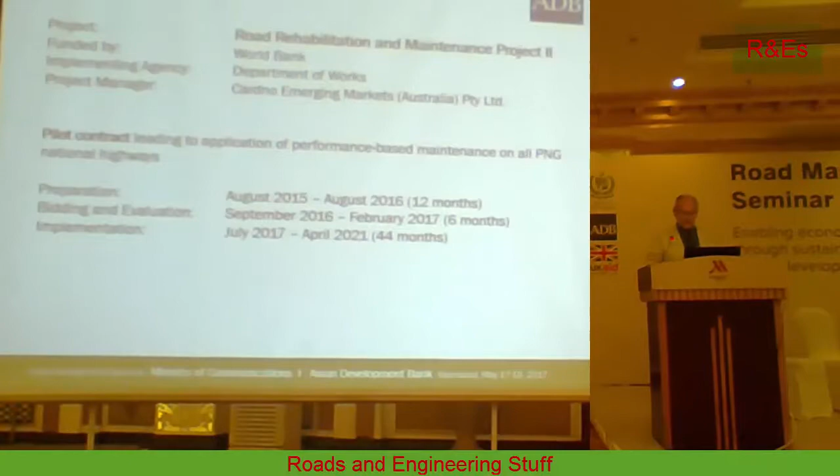The contract itself is a pilot contract for an important section of highway that is intended to then be used as a model and applied to all of the national roads in Papua New Guinea. And at the bottom of the slide, you can see the amount of time that it has taken so far.

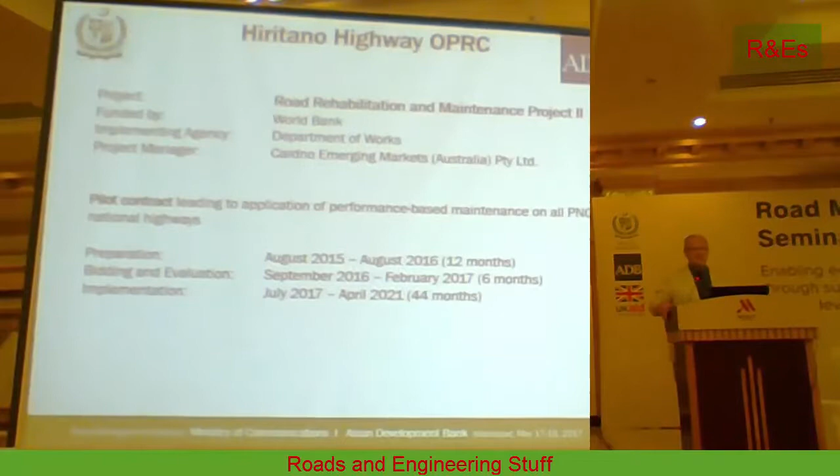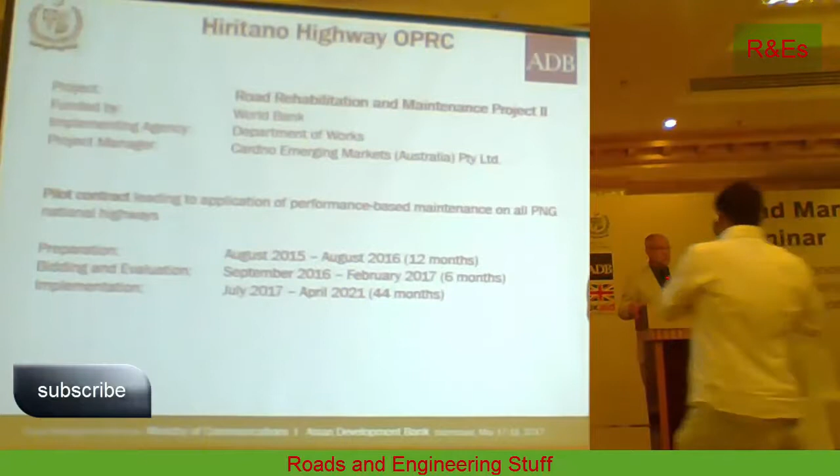The preparation took 12 months. The bidding and evaluation took 6 months. So that's basically 18 months from start to be able to award the contract. And the implementation of the contract will be 44 months. Originally, we had hoped for 60 months, but there were many, many delays in getting started, until I arrived, actually. And so the period of the project is actually determined by the loan ending date. So unfortunately, we're reduced to 44 months, but that is not going to change the principles and the activities in the contract.

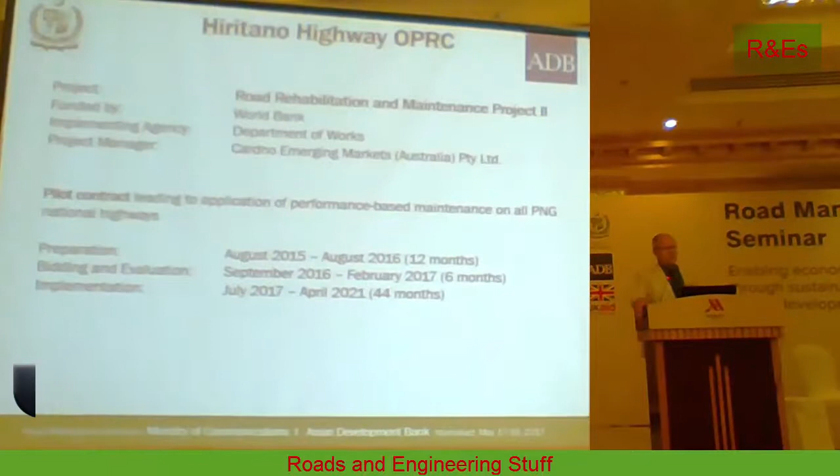So the Hiritano Highway is about 375 kilometers in length. It runs along the Gulf of Papua. The OPRC section is 112 kilometers. Just to clarify, OPRC is Output and Performance-Based Road Contract. That was the name that has been used in the past, but World Bank and ADB have now changed the terminology, and now we're using performance-based maintenance contract. But we're having to stick with OPRC because of the contract.

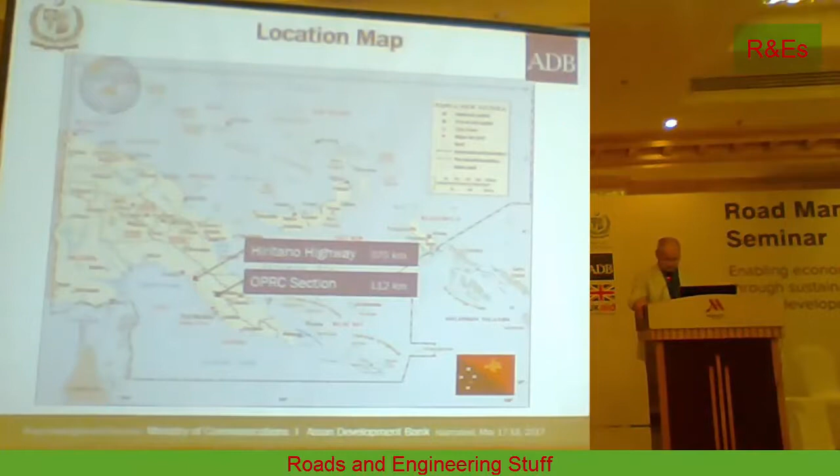The road runs through different terrains, plain areas, hilly areas, and along the road, the chief activities are growing betel nut and rubber plantations. And the road gives access from the capital, Port Moresby, up to a future development of the gas fields along the Gulf of Papua.

And what's interesting is that the road passes through different tribal areas, and Papua New Guinea is renowned for the variety and the number of different languages that are spoken, totally different languages. And along our 112 kilometers of road, 5 different languages are spoken. And the only way one group can speak to another group is through Pidgin English.

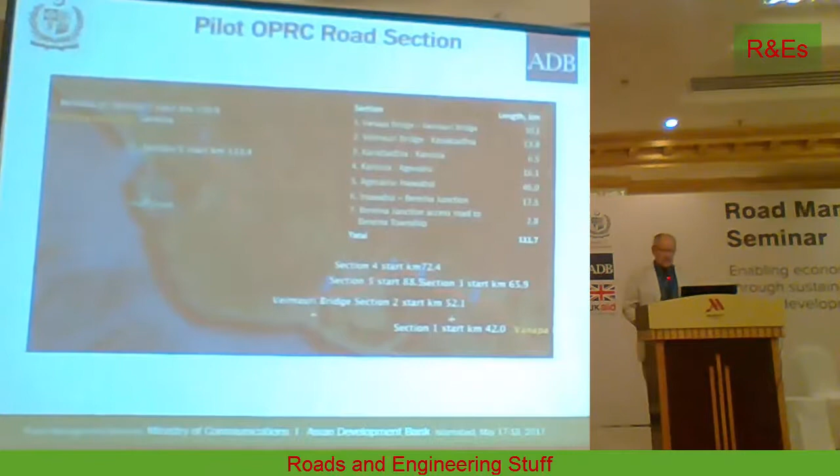You can see on the map, we have divided the road into 7 sections. And here are some more details of the 7 sections. We've sectioned them based on their construction history. You don't need to go through the table in detail, but basically the road was upgraded over about a 20-year period, progressively moving from east to west.

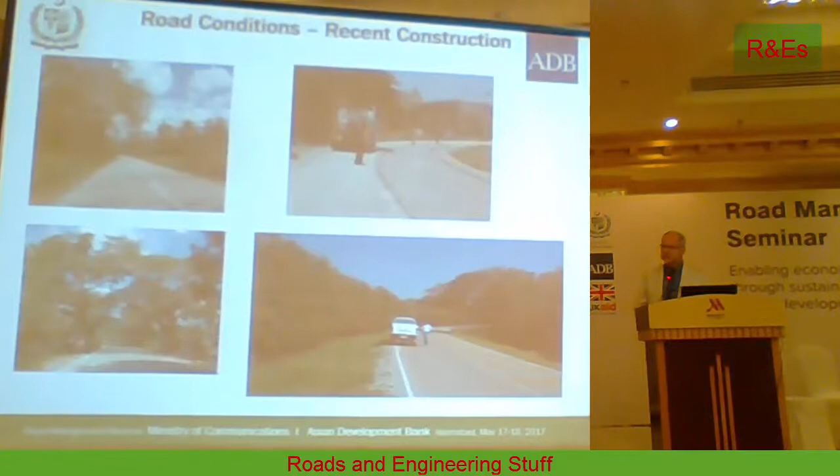So just a few photographs of the sections of the highway where there was recently completed construction in the last 2 years. Those sections are in very good condition. Then the oldest section of the highway is in bad condition. It's partly destroyed, and part of it is going to need total reconstruction. Part of it is going to need a mill and overlay.

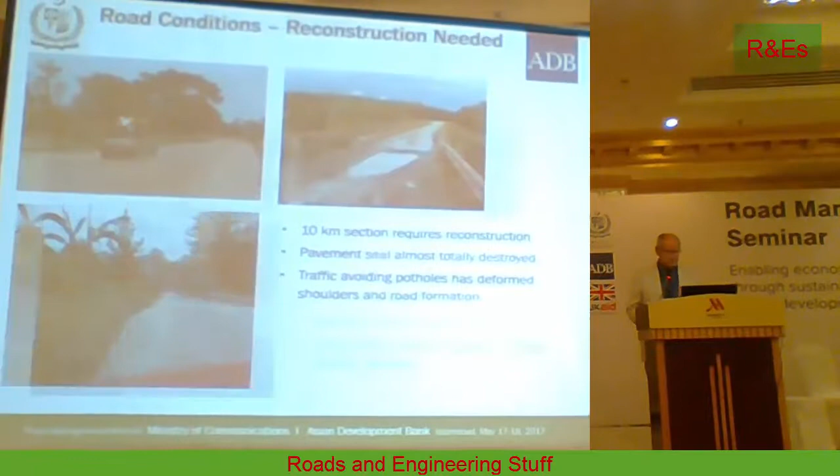Again, pavements and shoulders along the highway, the conditions varied from being reasonable to many, many flaws and defects. And unfortunately, the local residents have a habit, when they want you to slow down going through their little market area, they simply cut a couple of trenches across the pavement to force you to slow down. Or they put in their own hand-built speed humps. So there's a lot of interference from the locals with the condition of the pavement. But we think we have a solution to that. I'll come to that later on.

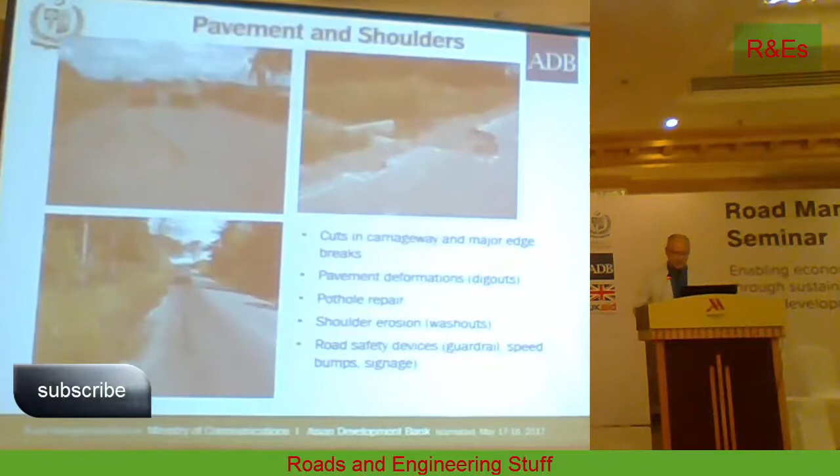We have 7 bridges. Generally, the bridges are in very good condition, but what happens is the protection of the abutments using gabion baskets tends to get washed away or eroded by the very high level of flooding that continually occurs.

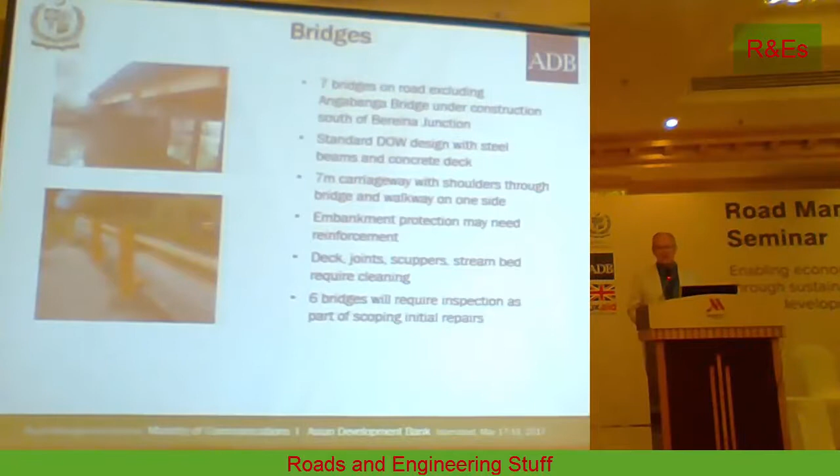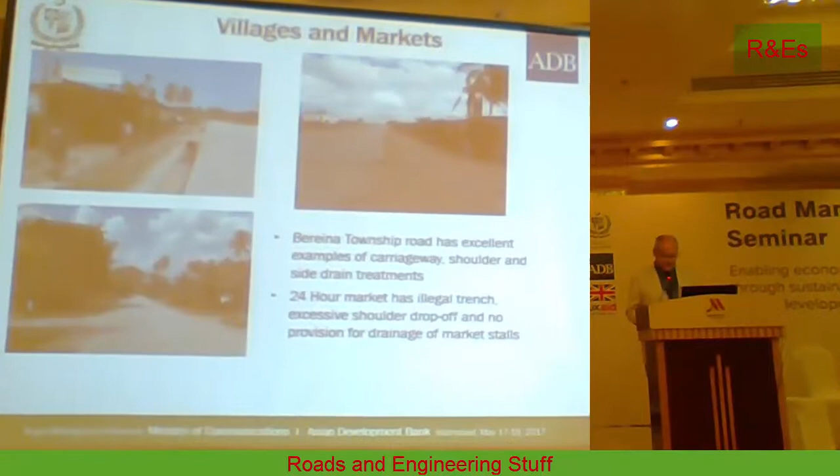Villages and markets, depending on where we are along the road, some markets are very well maintained. Other markets, particularly where they transfer the betel nuts at night, are very badly maintained with trenches in the pavement.

So I suppose the condition of the highway can be summarized in this graph, in which we show the length of the highway along with the roughness measurements on a per kilometer basis. And there's quite a clear trend. Starting at the left-hand side is the oldest section of the highway. And as we proceed along, the roughness reduces, and the newest section of highway has the lowest IRI reading, except for one spike, which is a bridge under construction.

So what we need to do during the course of the contract is, of course, bring down the roughness in the first section and make sure that the roughness on the other sections is not going to increase to any significant degree.

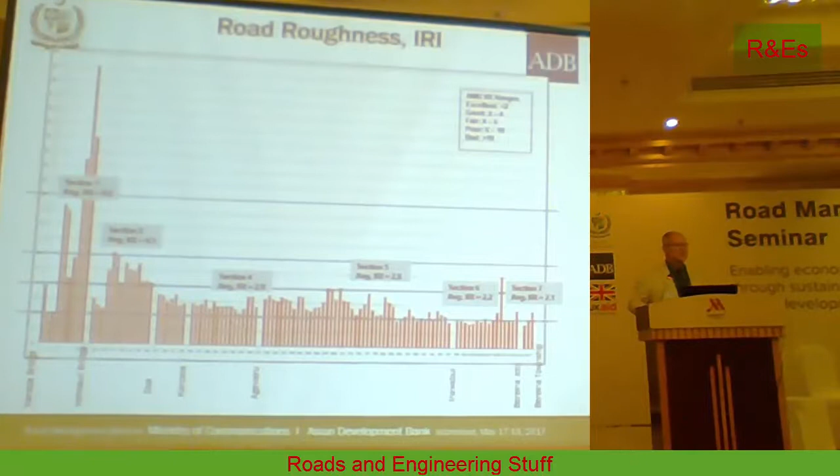I haven't shown a traffic slide, but the traffic on the highway is roughly 1,000 vehicles a day. There's a few trucks, but it's mostly passenger vehicles or trucks that are carrying passengers. And most of the freight carrying trucks are articulated vehicles. So there's less concern about heavy axle loading because they're carrying containers where there's less likelihood of having very heavy overloads.

Now, this is perhaps the most important slide, because it's going to demonstrate the approach, the strategy, the kind of solution. Given this top band, you have a road in 7 sections, 112 kilometers in length. But you can see we have color-coded the condition of the road. So in the first section, there's 4 kilometers of road in red that needs to be totally reconstructed.

Then there are 2 sections of road marked yellow that are in fair to poor condition, and they will require periodic maintenance very quickly. Then there are 3 sections in pale green that we expect will require periodic maintenance during the 4-year period of the contract. And finally, there are 2 new sections in the brighter green on the right-hand side where we don't expect there to be any resealing required during the contract.

So how do we go about tackling these road sections? You could also think of them as independent roads, a network. It's just they happen to be lined up. The first thing is we looked at the initial works of Section 1. It's divided into 1.1 and 1.2. It's 10 kilometers in length. And what is required there is the destroyed section, if you will, of 4 kilometers, needs to be totally reconstructed. And the balance, 6 kilometers, needs to be rehabilitated through a removal of the crust and additional base course material and then a reseal.

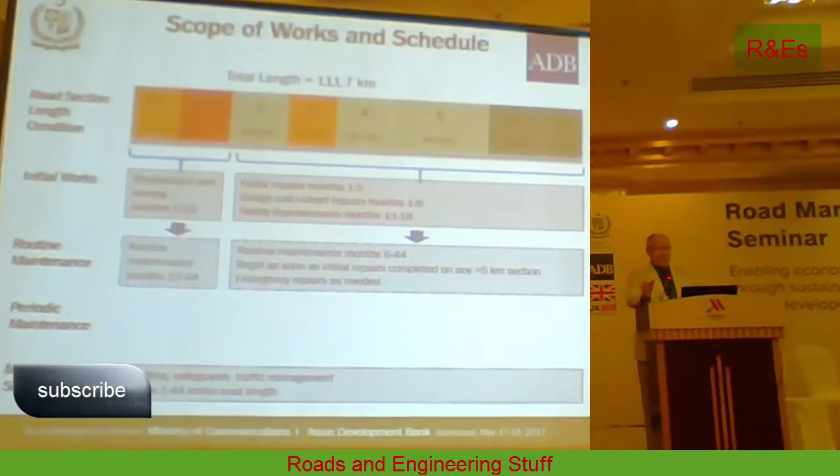Routine maintenance on this section, then, would start as soon as they complete the initial repairs, tentatively between months 6 and 44. However, as mentioned earlier, if the contractor completes his initial repairs on any 5 kilometer section before the 6 months, he can then immediately go into maintenance services and be paid his monthly maintenance services payment for those 5 kilometers. So there's an incentive for him to complete the initial repairs as fast as possible.

If I were a contractor, I'd immediately go to section 6 and 7, get the grass cut, get the culverts cleaned up, bang, and then go to the employer and say, right, I'm finished that. It's only 1 month now. I would like to start maintenance services, which he's perfectly entitled to do.

Now there's this other component, periodic maintenance. Now this is where it is a hybrid contract. It is not a purely performance-based contract. Because, as you saw earlier, and you can see on the ribbon at the top, the pavement conditions vary all the way along the road. So we are including a periodic maintenance component with its own separate bill of quantities for resealing or overlay as needed, between months 13 and 44.

Now we know that section 3, 6.5 kilometers, definitely requires periodic maintenance. So we have scheduled that for year 2. But periodic maintenance or overlays on the remaining sections would be decided at the end of each year and programmed for the following year. And it would be proposed by the contractor, the one contractor, and discussed and agreed with by the employer.

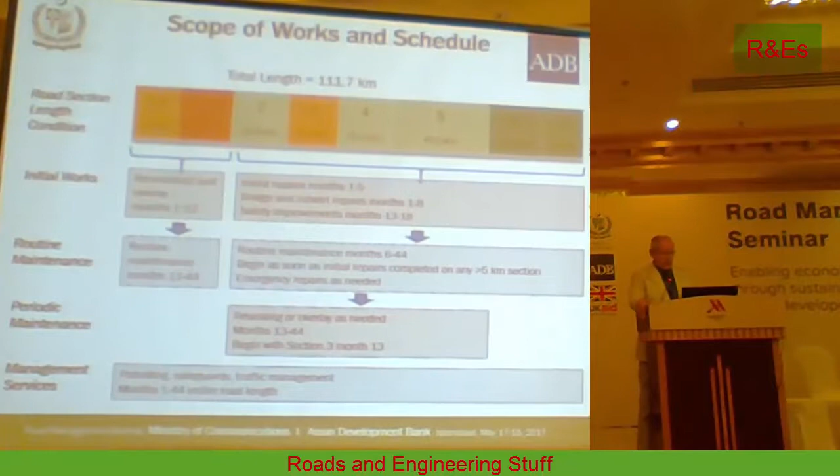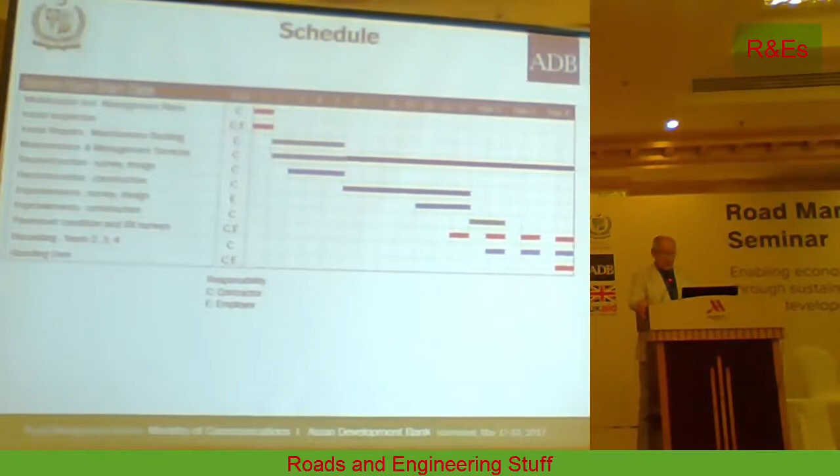Because we cannot predict exactly how the pavements are going to deteriorate over the next 4 years, there needs to be this flexibility. And of course, at the bottom, all of the road is covered by management services. Just a schedule showing how all of this is going to happen over the 4-year period.

Skip that. Now let's look at the actual bid document itself. It is based upon the World Bank OPRC standard bid document that was published or revised in 2009. Now, as it turns out, the World Bank has further revised this document in January of this year, 2017. And it's now called the Performance-Based Maintenance Contract Standard Bid Document. There are some minor changes between the OPRC and the 2017 document, but they don't change the intent at all.

And just for the information of KP, the performance-based maintenance contract that ADB is preparing will be using the World Bank 2017 version. So you'll have the benefit of the latest version. So if we look at what's in this document, I think many of you will immediately recognize the sections of the bid document, 1 through 6. Number 7 is the specifications, and then the conditions of contract.

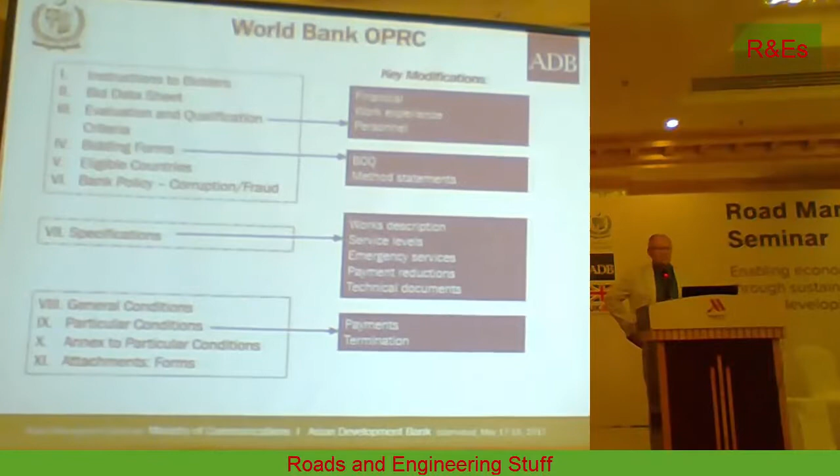And now we move down to the last box. We've got the general conditions, particular conditions, etc. Particular conditions: we have to describe the payments, how payments are going to be made, and, if you will, any criteria or conditions that would allow the employer to terminate the contractor. Because we've heard experiences where contractors fail to perform. It's sometimes very difficult to terminate the contract. Well, we think we have some conditions clearly described that would allow the employer to terminate the contractor if it became necessary.

Now let's look at the bill of quantities. And when you think about it, this is the first thing the bidders are going to look at. They're not going to read through all your words and everything. They're going to go immediately to the bill of quantities and see what works they have to do, what rates they have to quote, and, looking at it cynically, how they can, if you will, exploit this contract to their benefit. So the bill of quantities is very, very important.

So, first item is bill number 1, general. And it covers mobilization, insurances, and the preparation of a series of safeguard and quality assurance plans that the contractor has to submit in the first month of the contract. And he will be paid a lump sum for each one of these plans that he submits.

We mentioned safeguards because the project is funded by the Asian Development Bank. We have to comply with all of the ADB's safeguard requirements. And it turned out the best solution was to require the contractor or the bidders to submit their plans for complying with all of the bank's safeguard requirements.

Number 2 is the non-performance part of the contract, the initial repairs of 102 kilometers. So that's excluding that 10 kilometers. That's the rest of the highway, where there will be repairs to the pavement, to the drainage, to furniture, vegetation clearing, etc. All of those works will be paid on a remeasurement of quantities.

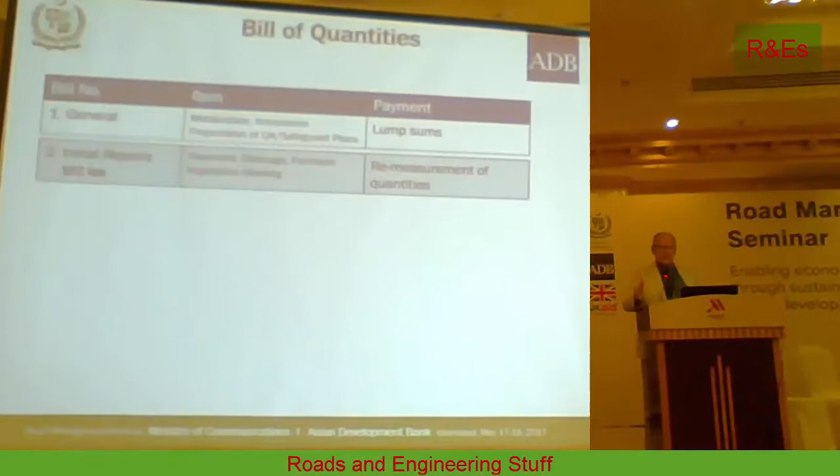And the reason is, number 1, it's a pilot. Number 2, there are lots and lots of defects in the existing highway. It's very likely that in a future contract like this, we might ask for a lump sum to complete all of the initial repairs. But because it's a pilot, because there are many, many defects in the road, and we wanted to attract good contractors and allay as much risk as practical, we have made the initial repairs a paid item based on remeasurement of quantities. It's not perfect, but we've got to make this work.

Number 3, reconstruction of the first 10 kilometers. Here we have made it basically a survey, design, build, and maintain a particular level of roughness, involving reconstruction over 4 kilometers and overlay over 6 kilometers. And that is going to be paid on a lump sum. So this is, if you will, the pure performance-based maintenance part of the contract. And we're very pleased to include it because it gives us a chance to try out this kind of pure performance part.

The fourth bill is the maintenance services over the entire 112 kilometers. It covers the routine maintenance activities in the field and what we call management services, the self-control unit and its implementation of all of the safeguard plans. And he would be paid a single rate per kilometer per month.

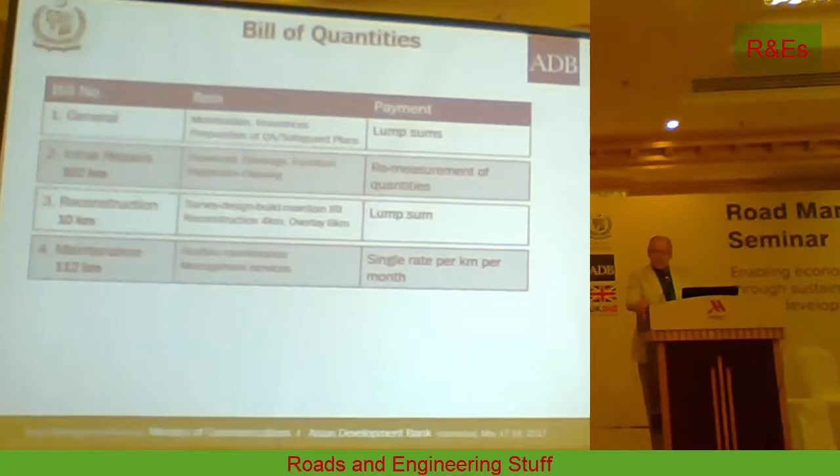Number 5 are the improvements. These include sealing more shoulders, constructing footpaths, additional signage, additional pavement markings for crosswalks, and probably additional guardrails. And we don't know the quantities yet until we get the initial repairs completed. So this is going to be paid on remeasurement of the quantities.

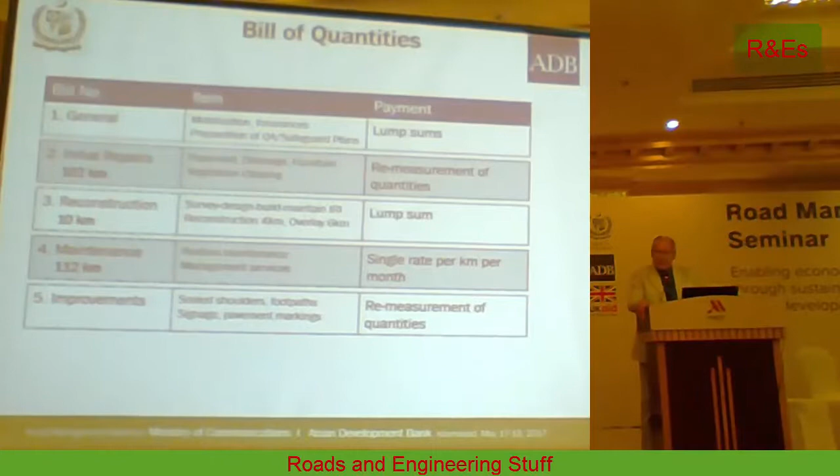Resealing, we are estimating 50 kilometers of resealing will be required during the 4 years. We have specified 5 sealing options, and the bidding document has an all-inclusive rate for each type of sealing option, with a simple measurement per square meter as fully restored, including pavement markings, speed bumps, and so forth.

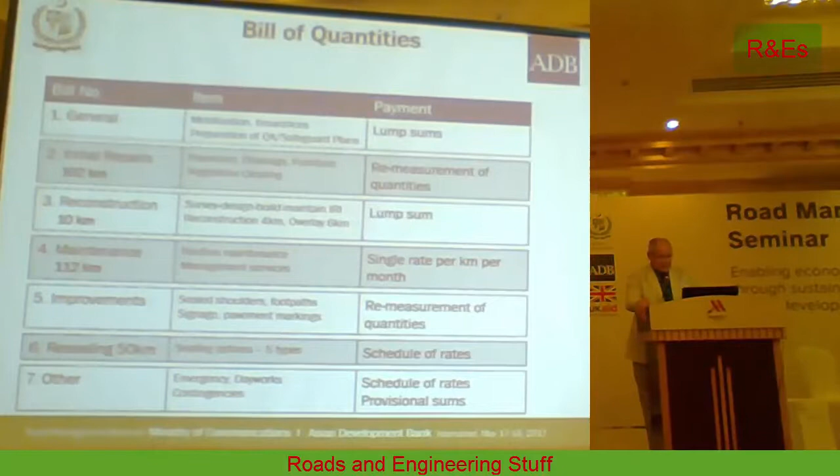And 7, there's the usual emergency services and day works and contingencies, and we are providing a schedule of rates and provisional sums. So this gives the employer something in his back pocket to get works done that are not covered under the other bills. So payments. How are payments going to be made?

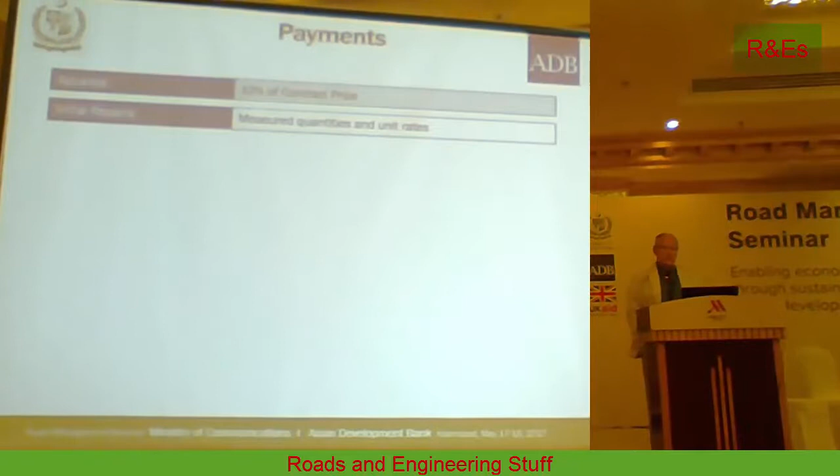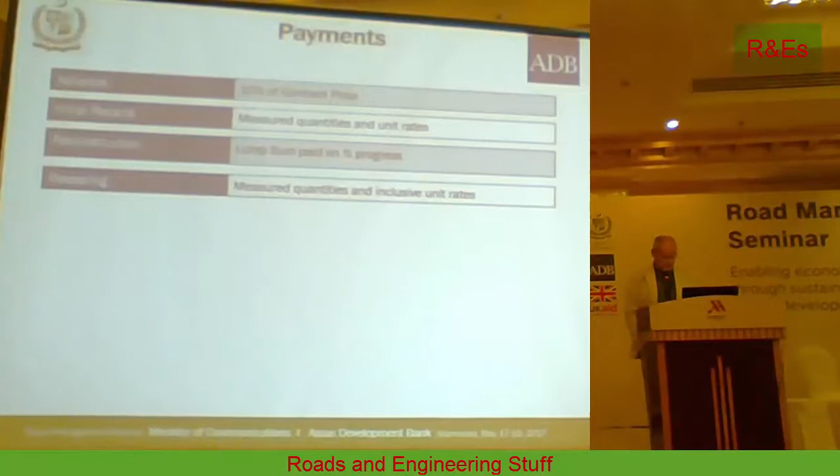Okay, number 1, the contract provides an advance of 10%. The initial repairs, there's a bit of repetition here, will be paid on measured quantities and the unit rates in the contract. Reconstruction of that 10 kilometers is a lump sum that will be paid as a percentage of progress as agreed between the employer and the contractor. Resealing will be measured quantities based on inclusive unit rates, as I mentioned. Improvement works, measured quantities and unit rates.

Maintenance services, I think we're going to use the basic procedure of a unit rate per kilometer per month. And payments can start as soon as the contractor has completed any 5 kilometer section. And there will be reductions from this maintenance service payment for non-compliance with the service levels. I'll give you some examples in a few slides.

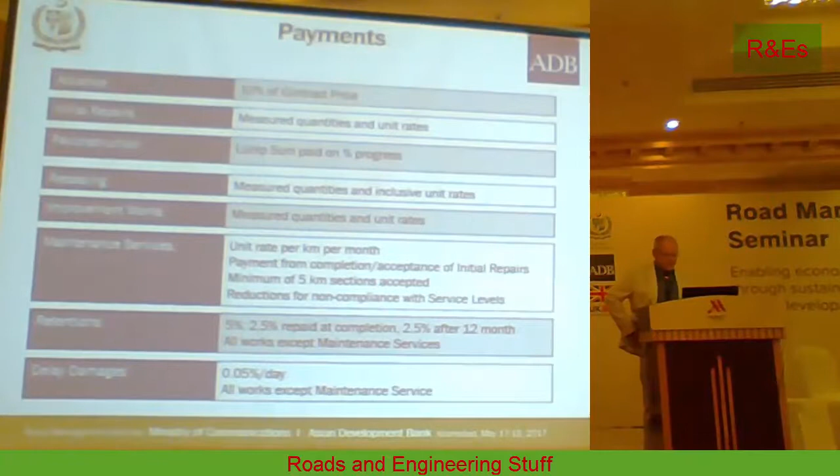Retentions, 5% retention, 2.5% repaid on completion of the initial repairs and rehabilitation works, and 2.5% after 12 months on all works, but there's no retention on maintenance services. Delay damages, 0.05% per day on all works except maintenance services.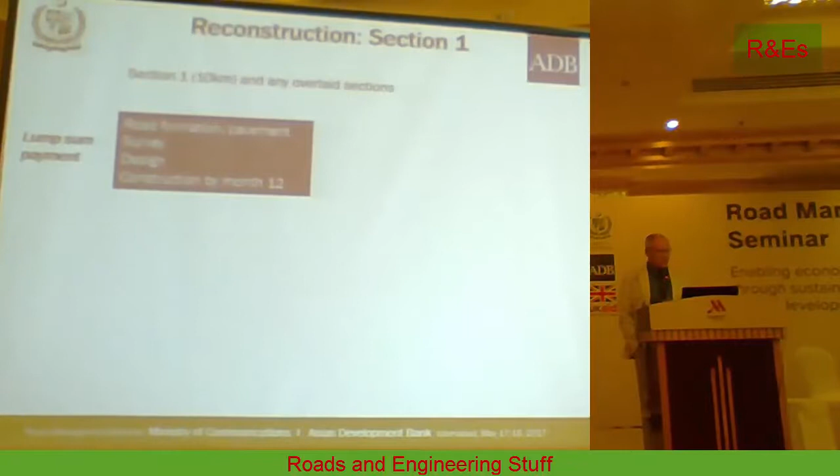So, Reconstruction Section 1. Now this is, again, a special case. So, what is required here? Section 1 is 10 kilometers. It also applies to any, I have to digress here for a moment. Remind me, when I go through the slide, I'll come back and explain. He will get a lump sum payment for the survey, the design, and the reconstruction of this Section 1, 10 kilometers.

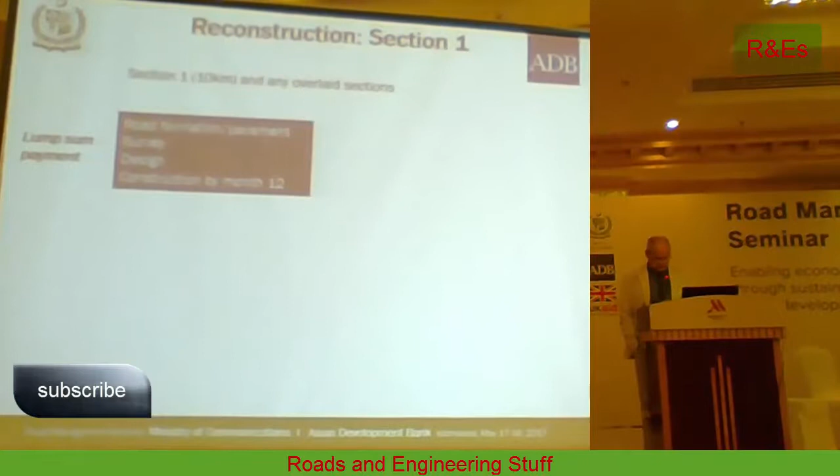But it's performance-based in the sense that he has to meet a roughness criterion. Number 1, it's measured at the completion of construction and then annually. And at completion of construction, he has to achieve an IRI under 2.3. And he has to maintain it at under 3 for the balance of the contract. If he cannot maintain it, he has to carry out remedial actions as required, or he will face a payment reduction.

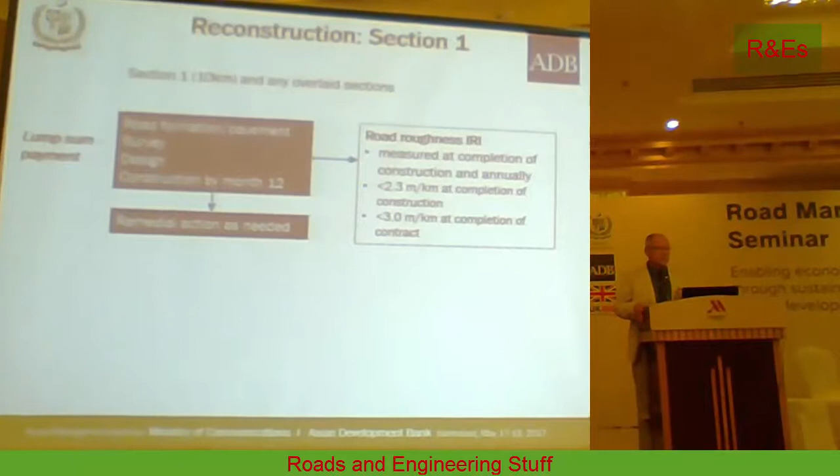This same model also applies to any section along the highway where there's an overlay done in the later years. If it's a straight reseal, the contractor cannot be responsible for roughness. But if the road section has deteriorated to an extent where he has to take up the seal, apply new base course, compact, and then put down a new seal, then we're saying you have to do that and comply with these roughness standards.

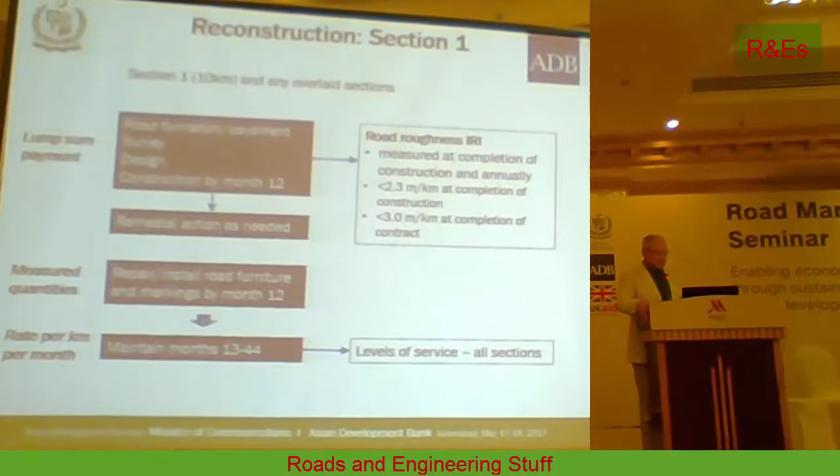Now in section 1, it's also a little bit complicated because in addition to reconstruction of the pavement, he's also got to replace the road furniture, etc. So those items he'll be paid on a measured quantities basis. And then as soon as he has finished section 1, he can finish it in 5 kilometer sections because that applies. Well, it's only 10 kilometers. He will then maintain that 10 kilometer section and be paid for his maintenance services.

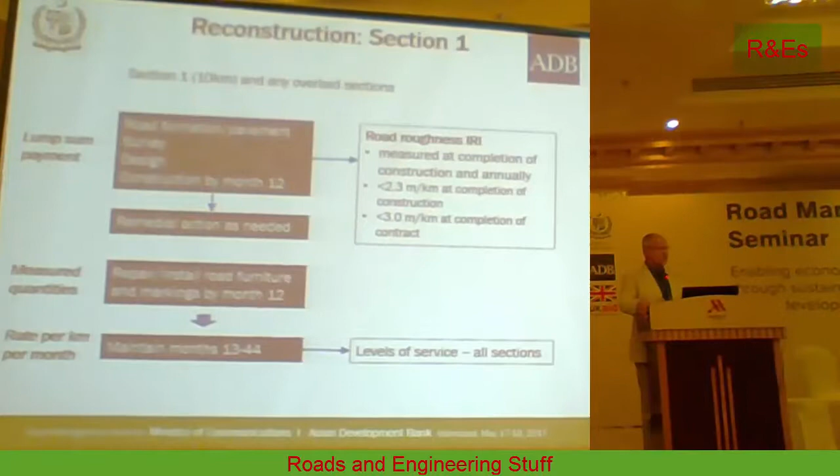Method statements. The bidders are to provide method statements for the initial repairs, reconstruction, resealing, maintenance services, and operation of the self-control unit operations. This is a very important part of the bid because we as the employer had to be absolutely assured these bidders understood what performance was required in the contract. During the bid evaluation, we actually disqualified 3 bids because their method statements were insufficient, and it was clear they did not understand what was required. So these method statements are very important.

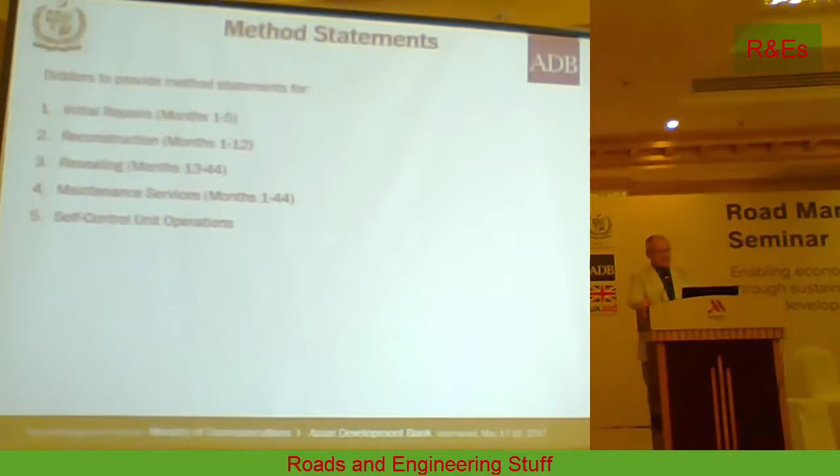The bidders also have to submit method statements for the environmental management plan, social and gender awareness plan, health and safety management plan, HIV/AIDS prevention program, emergency procedures, and traffic management plan. Most of these have been applied many times in many contracts, except number 10, emergency procedures. Usually that's a responsibility of the traffic police or the highway agency. In this case, he's taking over the highway, so he has to have an emergency procedures plan.

So if there's a road crash or a bad flood or something really serious happens along the road, he's the first responder, before the police show up after a couple of days. He is the first responder, so that's a responsibility that he's taking over.

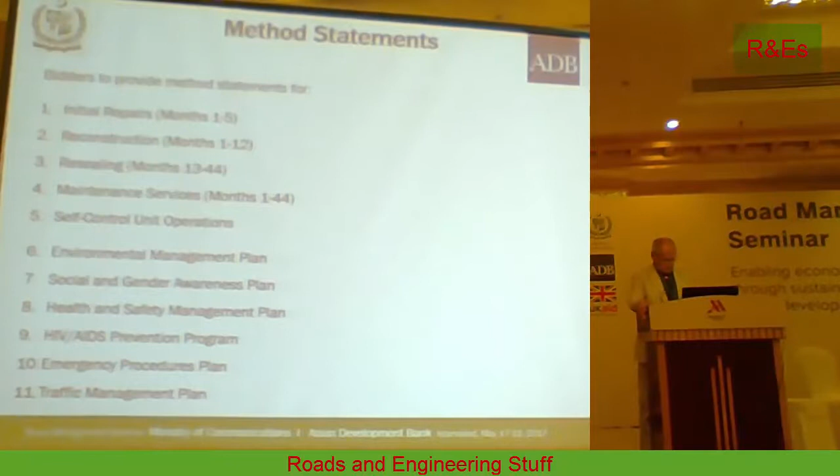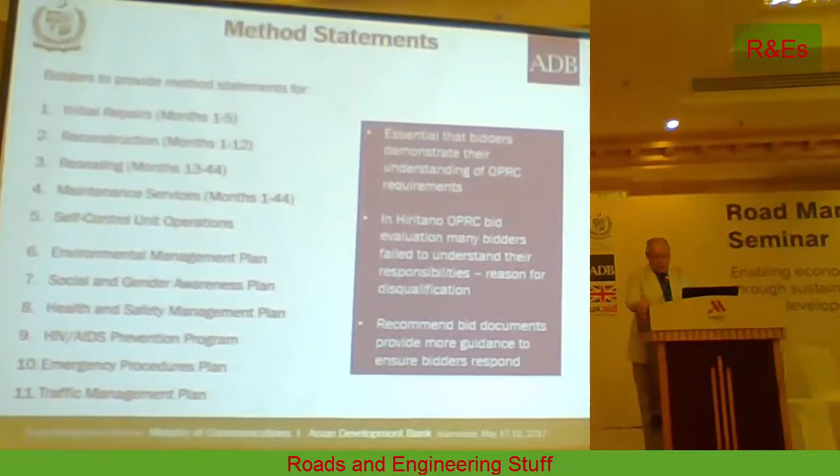So it's essential that bidders demonstrate their understanding of the bid requirements, the OPRC requirements. And as in the Hiratano OPRC bid evaluation, many bidders failed to understand their responsibilities. That was a reason for their disqualification. So we're recommending that bid documents provide strong guidance to the bidders so that it clearly defines what you want to see in their bids.

Specifications. They're divided into 4 parts: general specifications, and that's subdivided into work requirements and maintenance requirements. Let me explain. The work requirements basically describe the input-based part of the contract: what's required in initial repairs, reconstruction, periodic maintenance, and safety improvements.

And maintenance requirements address the performance-based part of the contract: the requirements for the self-control unit, for the inspections that are to be carried out, for the levels of service, which we'll see in a moment, for the management services that he has to provide, the reporting, and the payments he will receive and any reductions that may be made from payments for non-compliance with the service levels.

We don't have the preview screen. Hold on.

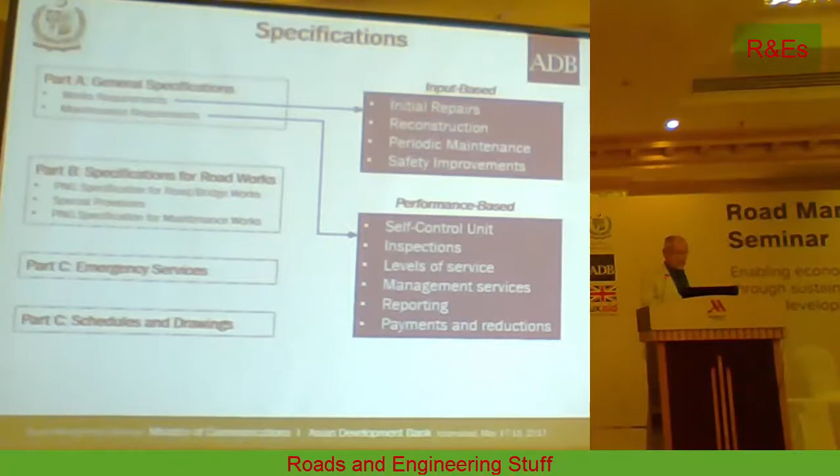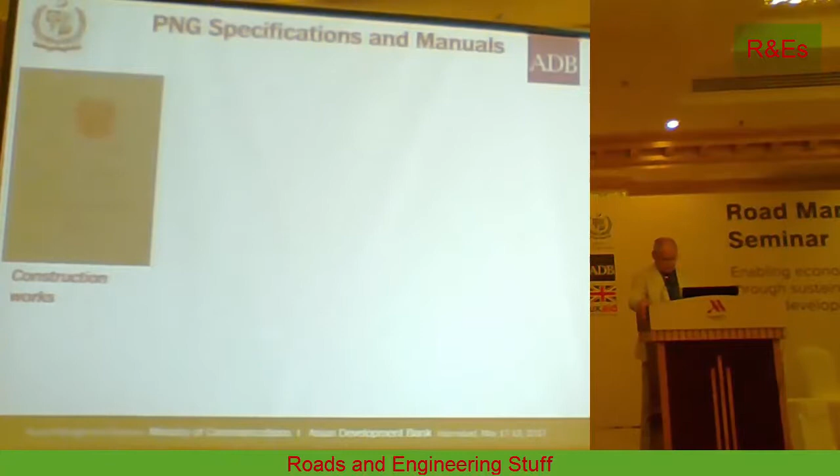Okay. Part B, that's the second box down, refers to the standard specifications. I'll just go on. And here are the specifications and manuals in PNG that apply in the contract. Number one is an updated June 2015 specification for construction of roads and bridge works. Number two is a draft specification for road maintenance activities that was prepared by AusAid for Papua New Guinea. In actual fact, when you dig into the spec, you see that a lot of it is extracted from Australian maintenance activities.

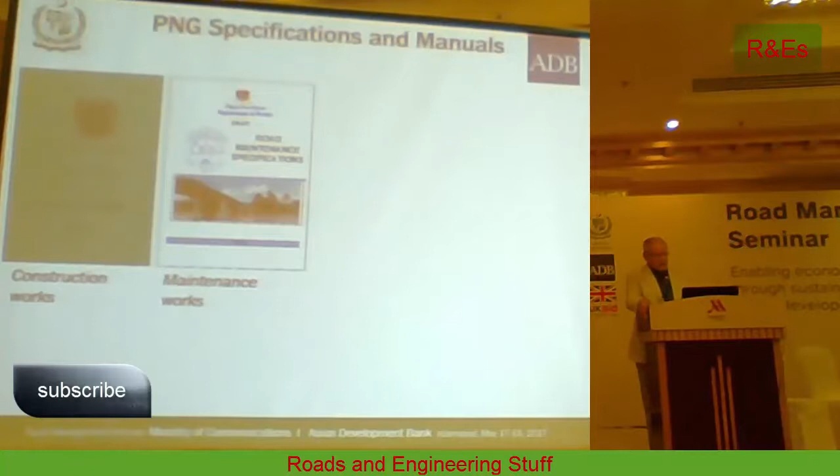A very important manual is this next one, pavement condition surveys. Sounds pretty simple, but the importance of this manual is that it has a clear definition of all the defects in the pavement, and those definitions apply in the contract. So if the employer measures a defect, he does it according to this survey. And if the contractor disagrees with the defect, this guide provides a clear indication of what is a defect and what is not a defect.

Now, the approach we took was we set the levels of service for defects from this manual, such that it was bad, poor, fair, and good. Every defect had 4 levels. And we set this level of service at the boundary between poor and fair. So when you think about it, the road actually could deteriorate to a point where it was just above poor in the fair rating, and it would still pass. And it's all quantified in this pavement condition survey manual. So very important.

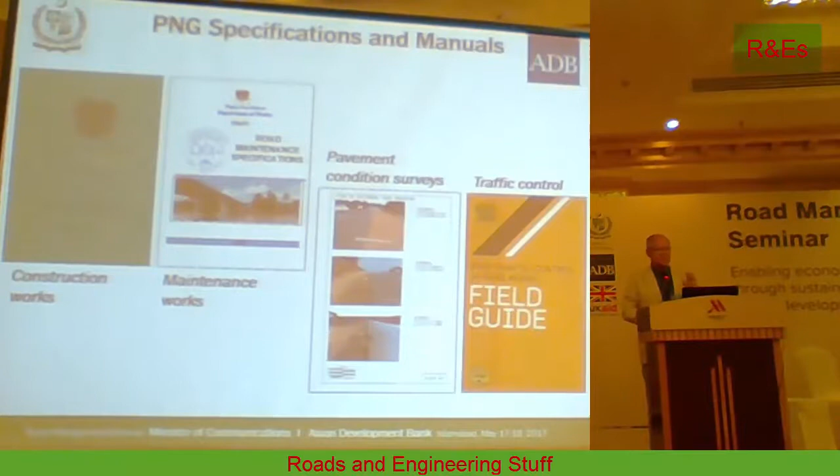Now, performance indicators need to be measurable. I've said that many times. So we have 8 groups of performance indicators. Road usability, keep the road open to traffic. Carriageway and shoulders, pavement, shoulder defects, hazards. These are the two key, if you will, performance indicators. With each performance indicator, there are sub-indicators.

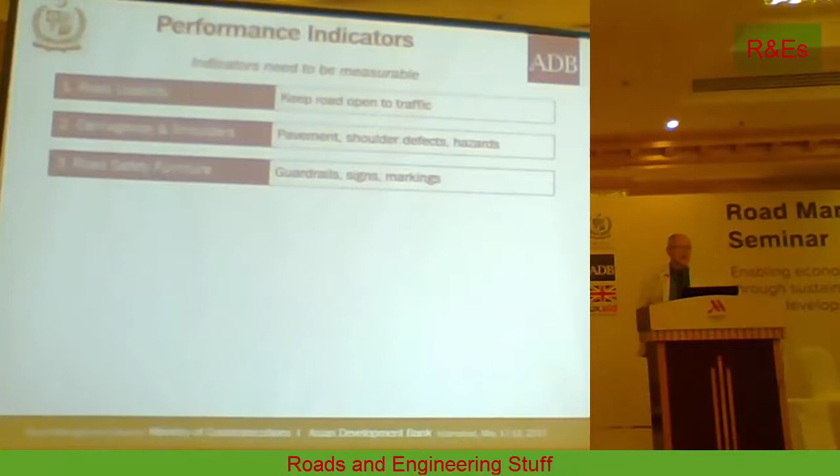Road safety furniture, guardrails and signs and markings. Drainage, culverts and side drains. Bridges and riverbanks, decks, parapets, riverbed abutments. Slopes and vegetation, erosion on both back slopes and side slopes, vegetation clearance. Big issue in a tropical country like Papua New Guinea, not so like Pakistan, at least this part. Vegetation grows like crazy. Has to be kept under control.

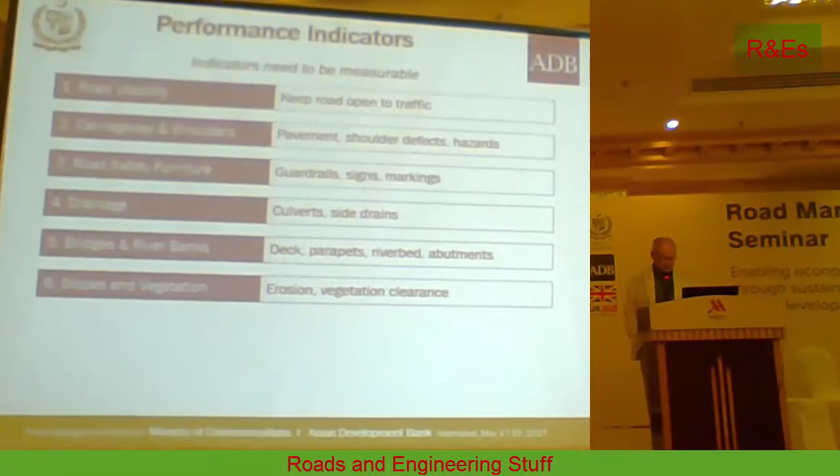Road durability. The roughness has to be within the specified limits. And management services, the self-control unit, environmental management plan, the quality assurance plan, traffic management, etc., the provisions in those plans have to be adhered to.

This is language up with which I will not put, yes.

Service levels. Okay. We've talked a lot about service levels, and one of the things that may or may not have been mentioned directly is that the service levels should be appropriate to the level of traffic, so that a service level for a motorway carrying 20,000 vehicles a day will be much, much higher than the service level you set for a two-lane highway carrying 1,000 or 2,000 vehicles a day. They cannot be the same. Otherwise, it's either too low for the motorway or it's way, way too high for the two-lane road.

So you have to use a judgment. Ideally, you should run through an economic analysis and try to determine what are the appropriate service levels for the traffic conditions on your road. Because the Hiritano Highway carries approximately 1,000 vehicles a day, we've set the service levels at what I would call a modest level. So, for gosh sakes, the guy does not have to fix a pothole within 24 hours. You might demand that for the M1, but you're not going to require that from a contractor managing the Hiritano Highway. So that, in a nutshell, is the approach we took.

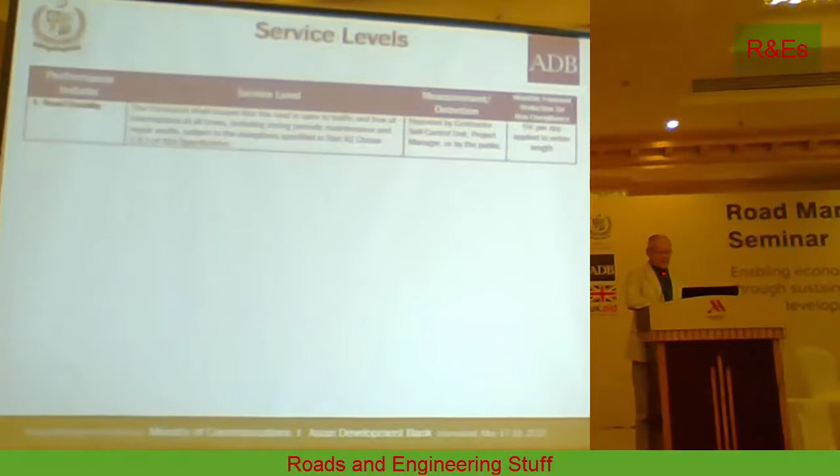So I'm just going to give you a couple of examples. Okay? Because there are several tables of service levels in the bid document. Extremely boring. Let's just go through one or two. Road usability. He's got to keep the road open. If he doesn't keep the road open, he's going to lose 5% of his monthly payment per day.

Potholes, area of potholes, we love potholes, size and number. As Ian mentioned, we're going to use, if you will, a density approach. He is allowed so many little potholes per kilometer. If it exceeds that number, there's a penalty. He will have a payment deduction. There is a however elsewhere, it's not shown in the table. If there is a large pothole, it's got to be fixed within 5 days because it represents a hazard. But otherwise, we will tolerate a certain level of small potholes under 300 millimeters diameter per kilometer during the monthly inspections.

Road signs, again, we have made reference to some specifications on what is required in terms of visibility from road signs, and there's a penalty if he, and I mustn't use that word, if he fails to achieve the requirement, there's a payment reduction of 10% of that kilometer's monthly payment. Road durability, we mentioned earlier, he has got to achieve the roughness at all times, or at least at the time of inspection, and the annual inspection. And if he fails to meet that, he'll lose 50% of the kilometer per month.

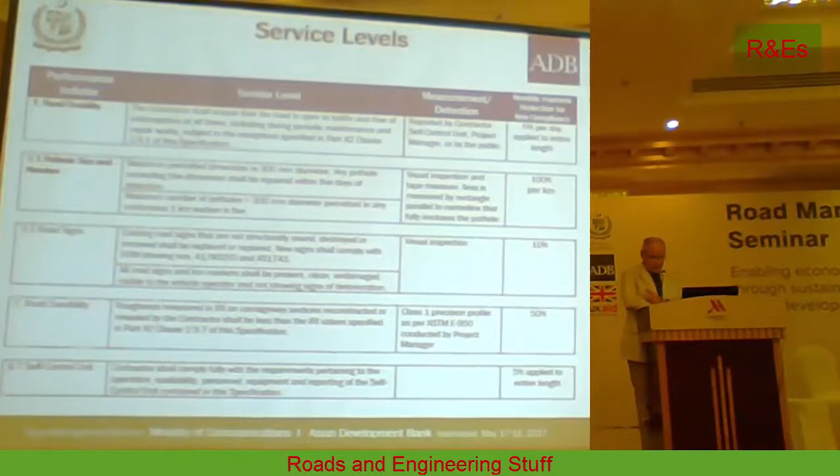And the self-control unit, there's a whole series of activities that the self-control unit has to carry out, and the payment reduction will be 5% if he's found in non-compliance, 5% for the entire length of the road for that month. Response times. The contractor must deliver his service levels at all times. And the defects, what we're basically saying is, with a couple of exceptions that we'll show in a minute, there's no response time allowed.

At the end of the month, there will be a formal inspection carried out by the project manager or the employer, and any defect at that time will be subject to a reduction in payments. He's not given another 30 days to fix that defect. That's the weakness of giving response times. The contractor will just sit back and wait till he's found out, and then he gets 30 days to fix it. We're saying, no. Whatever we find at the end of the month, reductions will be made to the payment for that item.

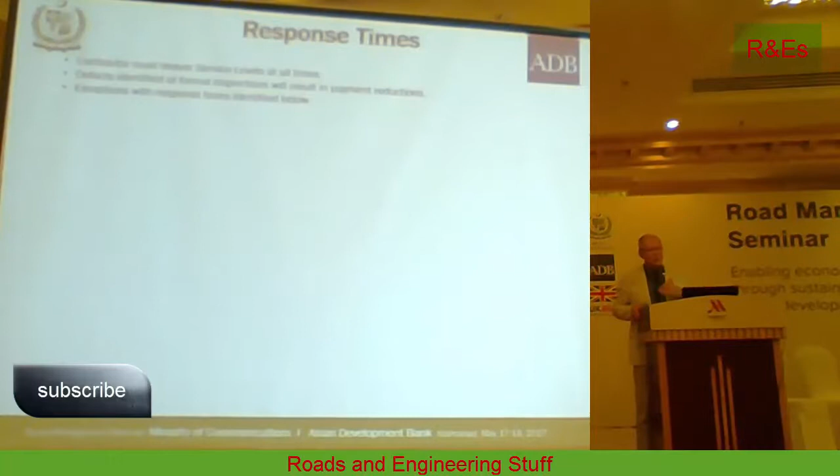But there are exceptions. You just can't have it all one way or the other. And there's a table showing some of the only response times that we are allowing. For example, we don't care what the road's like, the self-control unit has to patrol it once a week.

If the project manager goes out on the road and he finds a defect, he must inform the contractor within 24 hours. Road usability: the road cannot be closed for more than 8 hours. Exceptional weather, which is a problem with the cyclones in Papua New Guinea. We were giving 21 days from an exceptional weather event to repair any damage that's done.

We have to look out for lots of road crashes along our highway. It's high-speed roads. Time allowed to remove the vehicles from the shoulders: the contractor, someone will have to remove the vehicle off the carriageway, and it sits on the shoulder as a safety hazard. He's got 2 days to remove it from the shoulder. And after a road crash, he has 21 days to repair any effects of the road crash, such as replacement of guardrail or a handrail on a bridge. And he's got 5 days to repair any potholes that are greater than 300 millimeters diameter.

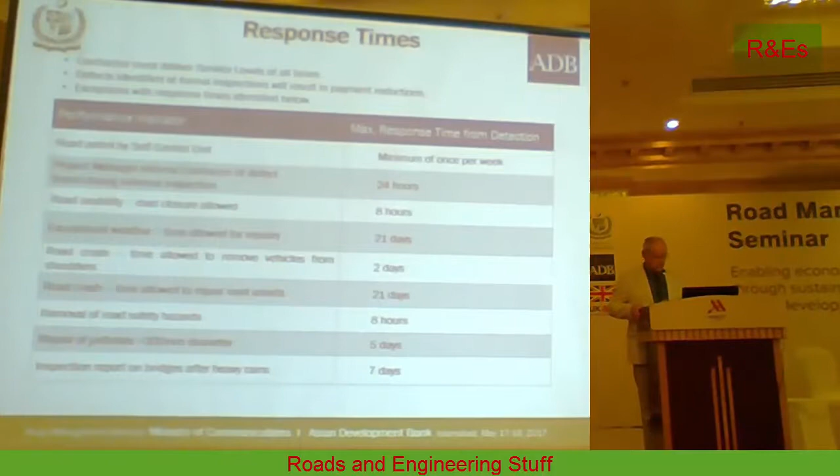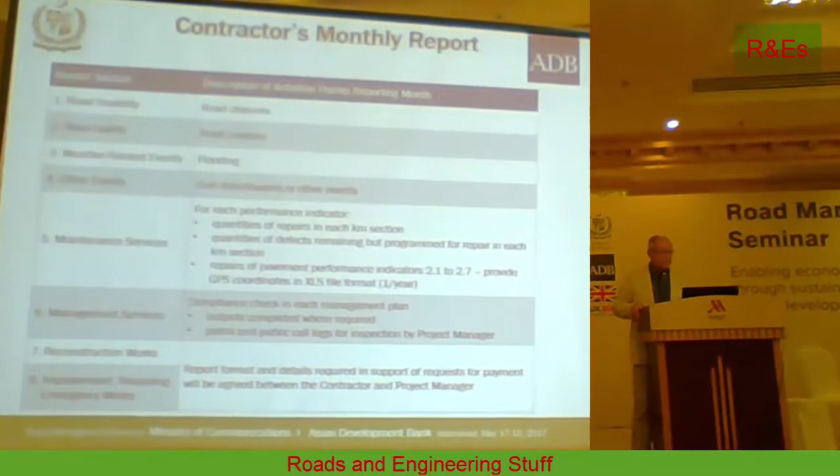He has a monthly report to prepare. It looks maybe a little intimidating. It's not. We'll use standard forms, and you should be able to complete his report very quickly each month. I'm not going to go through each one of these items. Okay, the next slide is part of his monthly statement, and for each performance indicator, it shows the percent reduction for non-compliance.

Now, there are 24 items, which I know is much more than New Zealand, but we have to start somewhere. Every time we tried to cut something, it got in the way. So we thought, look, let's go with these 24 potential defects as a start. In the next round of contracting, we may find that we could reduce these quite considerably. But we're dealing with a totally new situation in PNG, so it was best to be safe than sorry.

Now, what the table shows is basically the length of highway in each category that is non-compliant. And then there's a percent payment reduction. And the way we do it is we convert the percent payment reduction into kilometers. So in this table, you can see at the bottom, he's had several defects or payment reductions, the total adding up to 15.7 kilometers. Now, at full operation, he's paid for 112 kilometers. So he's going to lose payment for 15.7 kilometers because of these non-compliances.

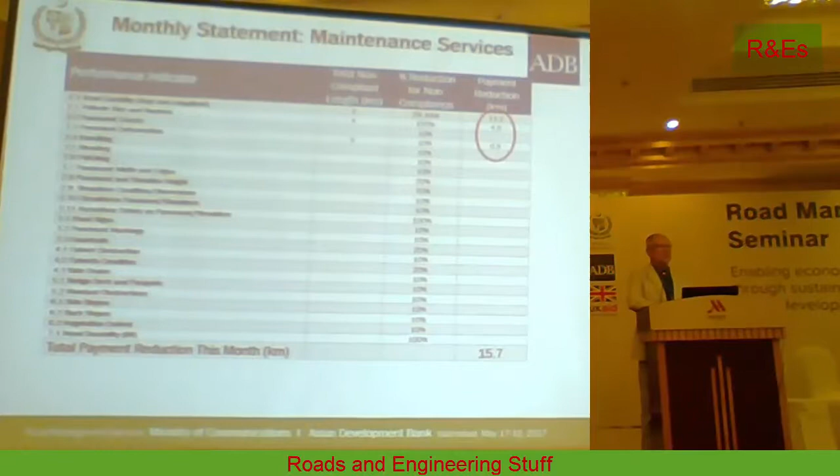There's also an additional monthly statement for compliance with each one of his management plans: his environmental management plan, his traffic management plan, his self-control unit, and so forth. The same thing applies. We allowed 5% of the total. So, for example, if he were clearly defective in applying the traffic management plan, you can see a little circle up there, he would lose 5% or 5.6 kilometers. And then when we add them up, in the center table, he would lose a total of 21.3 kilometers, and we would only pay him for 90 kilometers.

Now, if I'm the contractor's general manager back in head office, I would be asking my road manager, hey, how come you were not paid for more than 20% of the road this month? The final part along the bottom shows how, if the reductions exceed 50% in 3 months, that's grounds for terminating the contract.

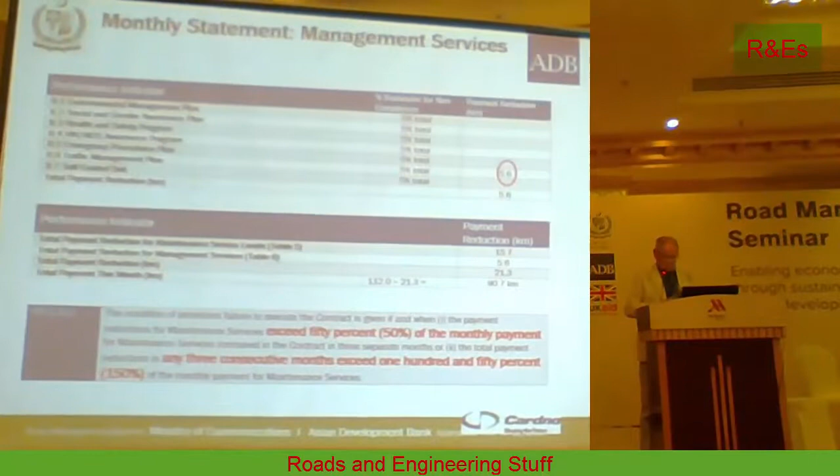So I'm going to keep going. Time is ebbing away. Hang on. Just got a couple more slides.

Additional features, very quickly. We're providing kilometer markers because they aren't there now. There's going to be a road safety inspection done at the end of year 1 to determine what improvements would be required. The contractor is going to be asked to collect asset data for the Department of Works Road Asset Management System. He's free to propose new materials and methods anytime, and he can and will and must subcontract the labor-based works to the local community groups along the highway. Otherwise, they're going to just dig more trenches in this brand new pavement.

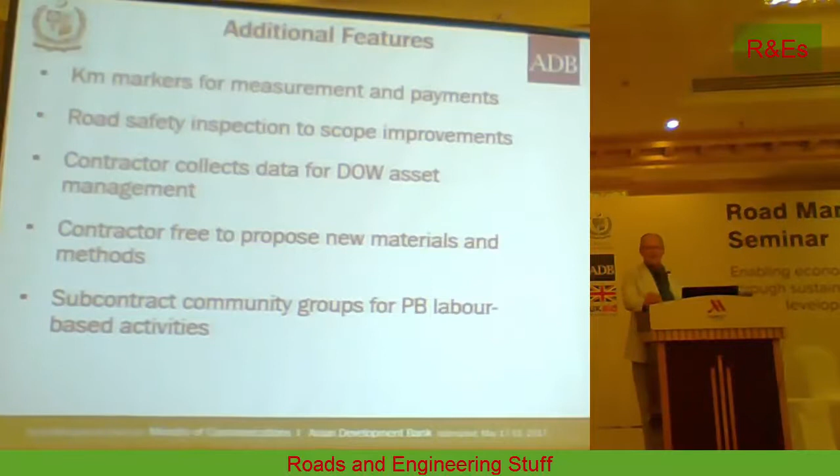And there's another point not contained on this slide, but in the document: because it's a pilot, there is a clause in the contract document that allows for a review of all of the contract conditions after 12 months, involving the employer, the contractor, and an independent party. So anybody can bring their grievances to this meeting, and there is a provision that if both sides agree, they can make a change to the contract, to correct something crazy that we have to consider. The community groups along the highway will definitely be involved.

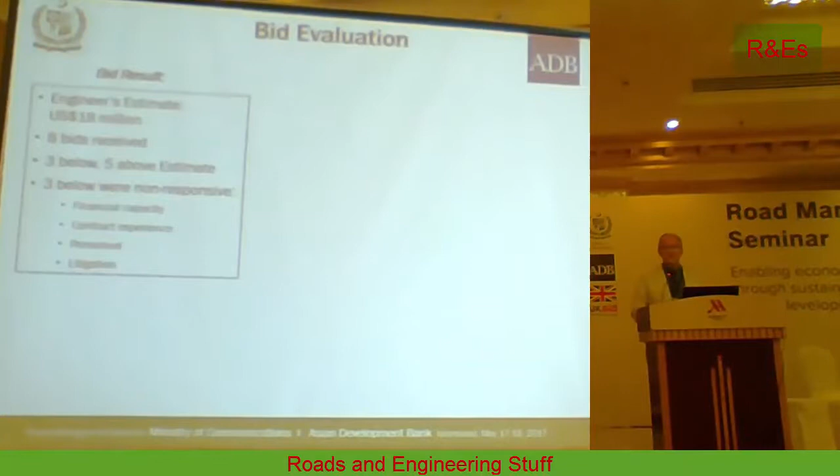Bid evaluation, very quickly. Our engineer's estimate was $18 million. We received 8 bids. Terrific. There was real interest: 2 international contractors, and the rest were Papua New Guinea contractors or joint ventures between Aussie companies and PNG companies. 3 bids were below the engineer's estimate, and 5 were above the estimate, but the 3 below the estimate were disqualified on the basis of their financial capacity, their experience, their personnel, their litigation history, and really failure to provide an adequate method statement.

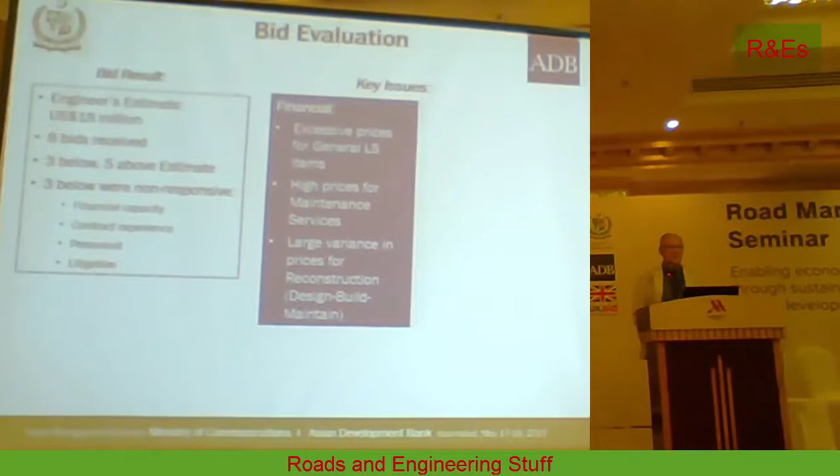Here they are. And now the issues. What happened? What we found was that there were excessive prices for those general lump sum items. And contractors are rascals, they were front-loading it. There were very high prices quoted for maintenance services. And there was really a large variance in the prices quoted for that design build section on section 1.

Now, on the technical side, many of the method statements just showed that the writers did not understand what was being required of them. In the end, just last month, the contract was awarded to the 4th lowest bidder with a contract price 10% higher than the engineer's estimate.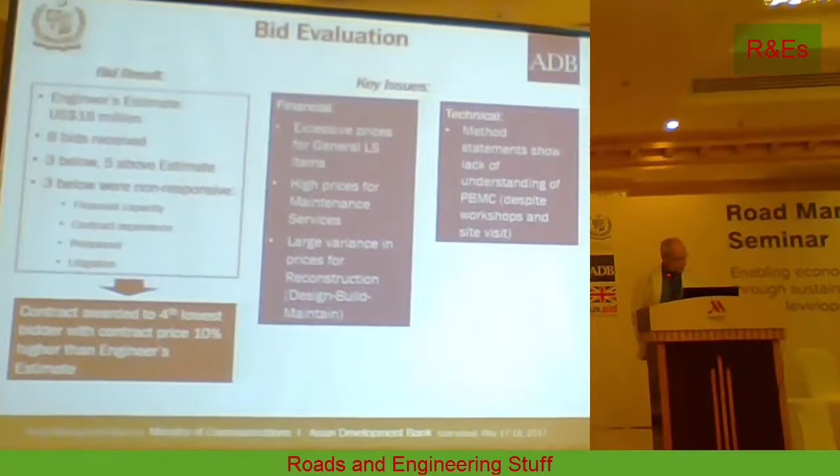I'm going to skip over risk factors. I'm running out of time, so I'm going to skip over risk factors because actually they've been covered several times. But just at least just show them. Oh, okay. Physical factors. It's like Nepal. PNG has a high risk physical environment. Relations with the communities along the highway.

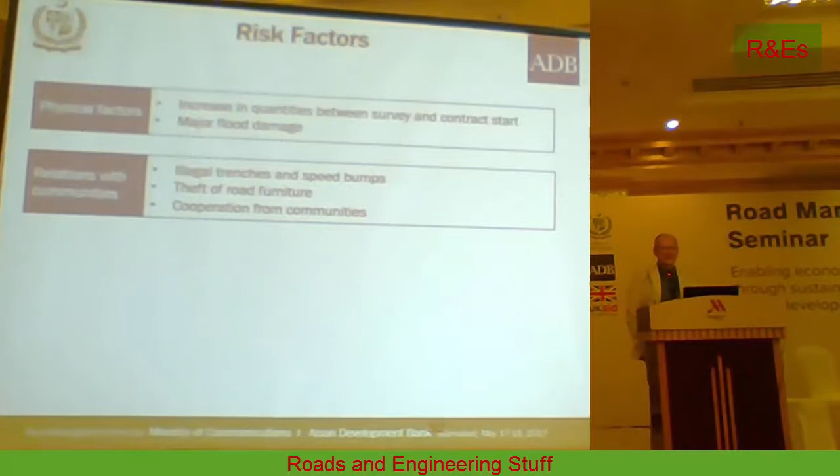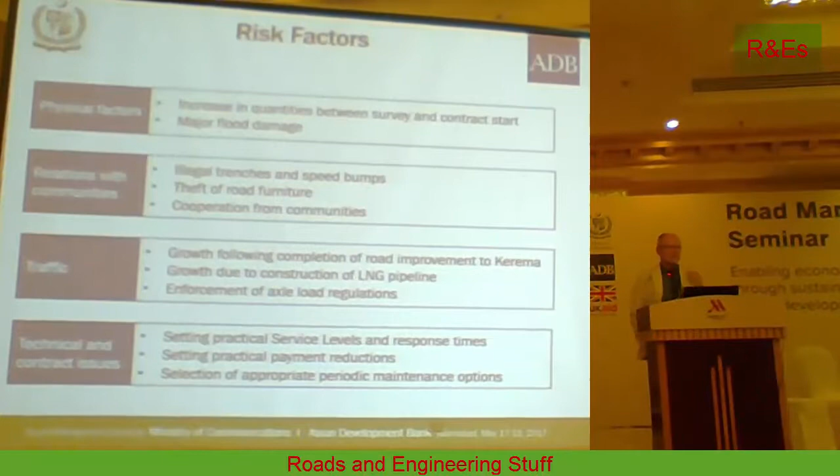They say PNG is where the wild things are. They're not referring to the wildlife. So you have to have good relations with the communities. Traffic. We just don't know about the traffic because we don't know about these gas field developments. And again, all the nuts and bolts of the levels of service and so forth. There are risks in there that we'll only learn about as the project proceeds.

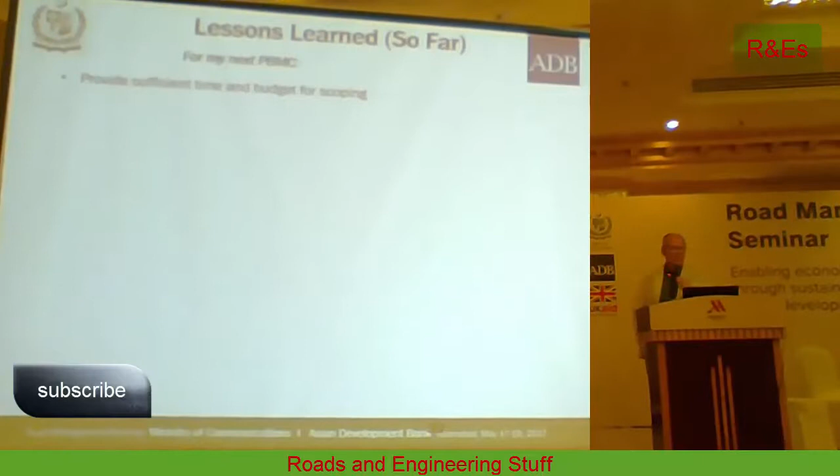So, lessons learned so far, and for my next PBMC, which hopefully will benefit KP. Number 1, provide sufficient time and budget for scoping of the works. It took us 12 months to do 112 kilometers. Be conservative in estimating costs, because we're dealing with unknowns in many instances. Conduct several workshops for interested bidders and Employer personnel. Get people on side, get people educated, get people supported.

Require bidders to attend the pre-bid site visit and meetings. Set exacting qualification criteria for the bidders in terms of their financial, their contract experience, and their personnel. Require detailed method statements in the bids. And you should provide outlines. Each method statement, say, look, you need to cover this point. Assess the method statements to disqualify unresponsive bidders. Fading here.

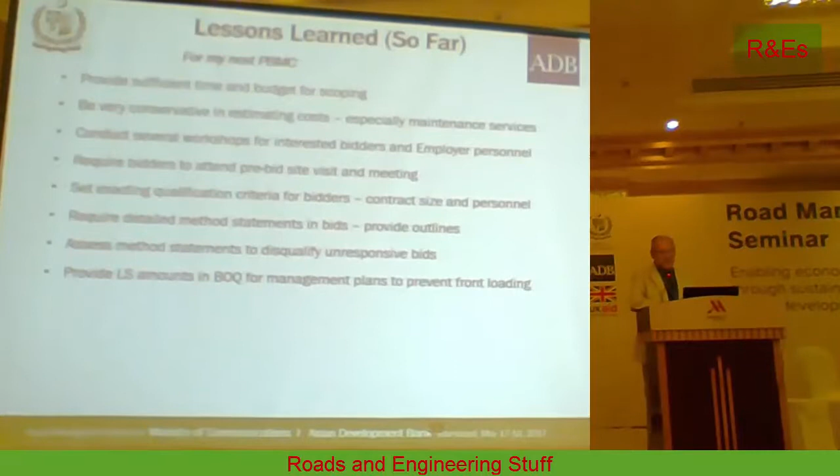Provide lump sum amounts in the BOQ for the management plans to prevent front loading. The amounts are small, so maybe put in an amount rather than asking them to fill in an amount, and then you get a nasty surprise. Ensure that a sufficient percent of the bid price is for the maintenance and management services. And there's different ways to do this.

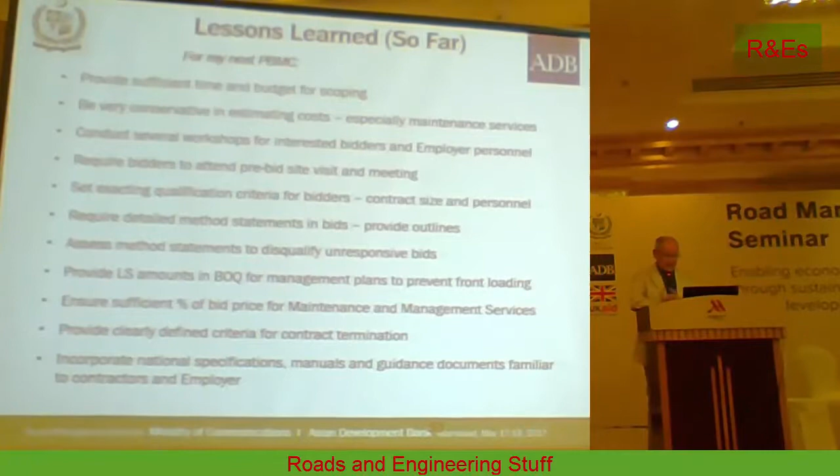Provide clearly defined criteria for contract termination, which I think we've done in PNG. Incorporate national specifications, manuals, and guidance documents that are familiar to both the contractors and the employers. Tenkyu tumas, they say in Pidgin.

Good. Somebody have a question for this presentation? Yes, sir. Thank you. I don't have a question but a comment.

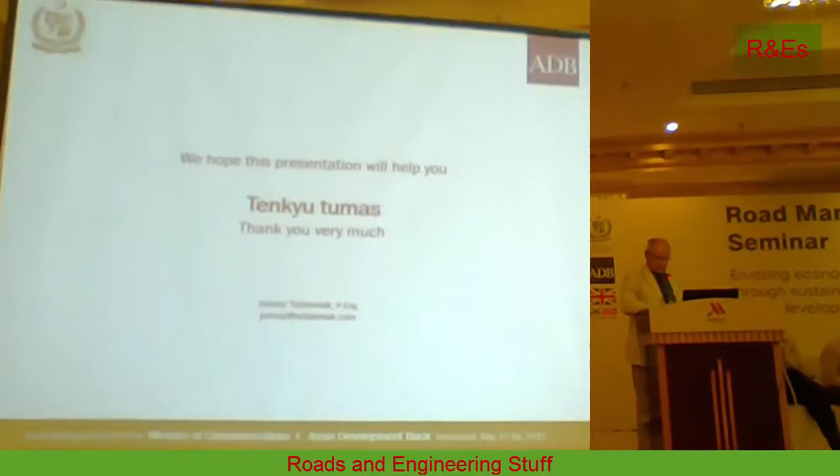See, this contract that has been designed is not the first one in PNG. There was an earlier attempt to do a performance-based contract in PNG with ADB assistance, and that failed to achieve its results. And not just that, but in that contract there was clear collusion between the contractors and the supervision consultants. There was hardly any inspection, and these monthly payments were made on a pretty regular basis with very little accountability. So, with that as a background, this new contract was prepared taking into account the lessons learned from the previous experience.

Thank you. That's correct, and we're very fortunate that several well-qualified, large Papua New Guinea Australian contractors bid on the project, and it's been awarded to one of those companies, and there will be an international consultant supervising, sort of monitoring the works and administering the contract for the employer.

Any other question? Yes. Hello. One more question, please. You have told on the slide there were 8 bidders, 3 were unresponsive and 5 were successful, and out of those 5, 1 was 10% above the engineer's estimate. My question is why those 3 unresponsive bidders were issued documents before bid? Why were those issued documents?

They shouldn't have been issued the bidding documents if they were financially having less capacity. The 3 unresponsive bidders, you have issued the tenders to them also to participate in the bid. Why were those issued? The concerned person hasn't seen their documents first before issuing the bidding documents. The bidding capacity of the firm.

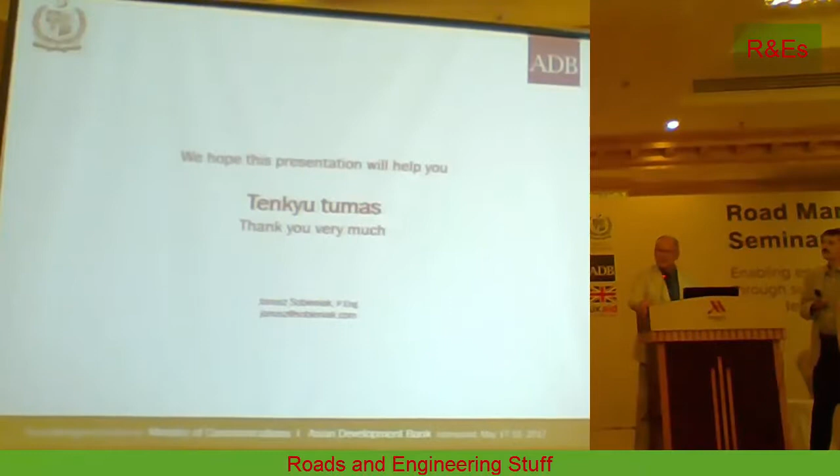Why were those 3 tenders irresponsible? Not responsible, sorry. Okay, it was post-qualification, and they were able to view and purchase the bid documents before submitting their bids, correct? Now, in all 3 cases, they were just, how should I put it? One was just clearly mistaken. He was trying it out. His experience was far below what was required. He wasted his time to submit the bid.

Another, when we did an evaluation of his financial capacity, he was low, but we didn't disqualify any bidder on simply one item. In all of those cases, there was a combination. Each bidder failed to achieve the criteria in one item, plus was deficient in others. We could make an exception, perhaps, if there was a small deficiency in one item. But there was a large deficiency in one item for each of those 3, plus minor deficiencies in other items. And I don't understand why 2 of the 3 bidders wasted their money to submit bids.

It means you do not allow the pre-qualification of the contractors before allotting the works. Pre-qualification. It was done on a post-qualification. Yes. Yes, Mr. Singh.

In the PBC contract, we have clauses for guarantees and also for reward for contractors. We have discussed the guarantees, but what about the reward for contractors? I'm sorry, Saeed, can you repeat the question, please? In the PBC contract, we were discussing that the guarantees on the contractor are not expensive, and also there is some reward for the contractor. What about the reward? In this case, there's no reward, there's no bonus.

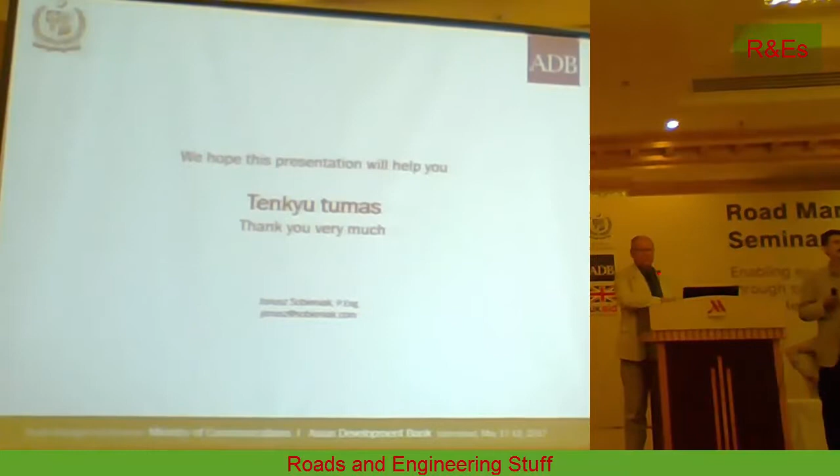Hello? On the basis of the reference index, you have sections, section 1 and section 1.1 and 1.2. And you propose initial repairs and routine maintenance for the period of 1 to 12 months. So after reconstruction and overlay of a specific portion of the road, you propose that we are blocking money for routine maintenance from 13 to 44 months. In Pakistan, and developing countries, you don't have much money to allocate for routine maintenance after reconstruction or overlay. So what would you propose? What is your comment? Is it specific to this case, or applicable to all countries and all cases? Okay, hold on.

In the first 12 months, or the first 6 months, he's going to bring the entire length of road, except section 1, up to the service level. So he's going to have a road in acceptable condition. In the first 12 months, he's going to bring that first section up to a similar level through reconstruction. So he's being paid separately to repair the road before he maintains it. So he has to base his maintenance price on the knowledge that it covers routine maintenance activities, minor crack sealing, minor edge repairs, etc., to a pavement that he has already been paid to bring up to a good standard. Does that help? Last question, Mr. Jamal.

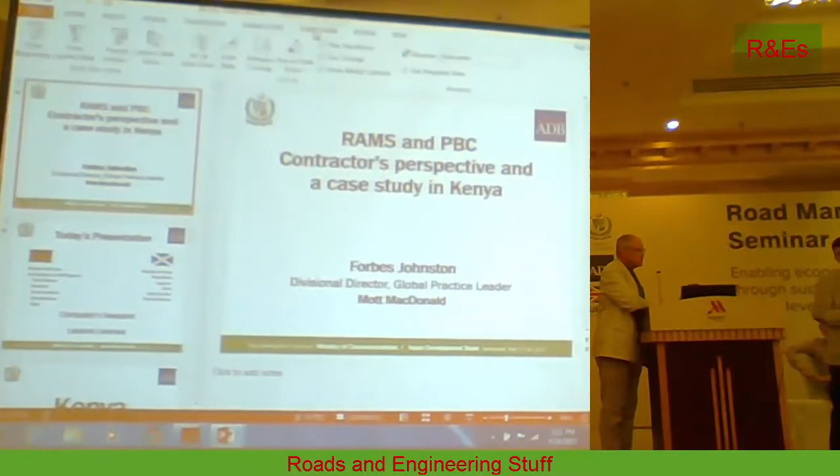Sir, yes, please. Safeguard plans. Hello? Safeguard plans take considerable time to implement. Please comment on that, especially the ADB projects. And second, the front-loaded projects. Comment on that, is it positive, is it good or bad? Front-loaded projects. 2 questions. Thank you. The safeguard plans are a challenge to the contractor. During implementation, it takes considerable time. Please comment on these safeguard plans. Okay, well, let's do it in 2 steps, or 3.

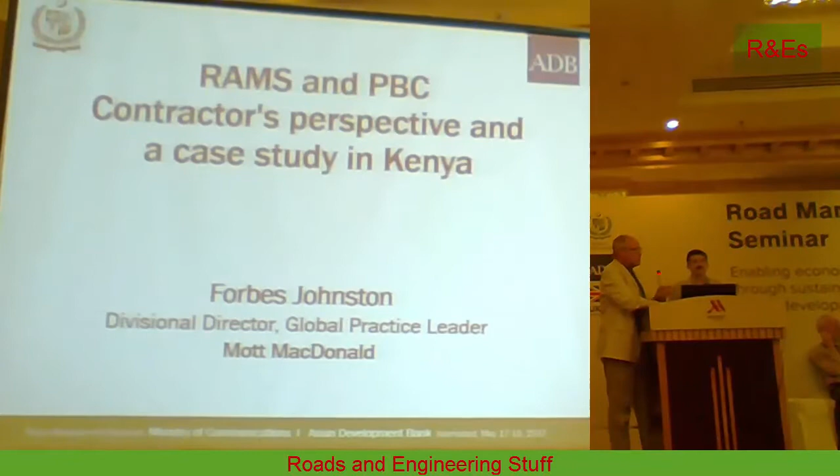First of all, in the bid document, there's a specification for what is required in each safeguard plan. Those specifications are either national specs in Papua New Guinea, or they've been given to us by the World Bank, saying, look, this is what has to be in, for example, an HIV/AIDS plan. So those specs are put in the document. The second step is, once the contract is signed, the contractor is given 1 month to prepare each plan, which is then submitted to the employer for approval and payment of the plan. Just the plan, not the implementation. He then has to implement each plan, say traffic management, over the period of the contract, 44 months. The cost to implement